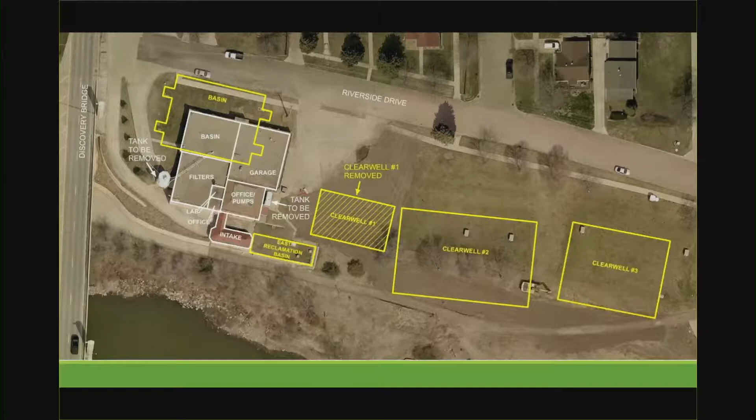Dave, can I ask you a question about the property? So when you say none of it is designated as a park, does that go all the way to the bridge then? That whole area is? That's from the title work that was done when the bridge was built. That's our understanding, correct.

Current status: it's got the correct electrical and plumbing services available to essentially be an office and a garage and a shop. If somebody was proposing some use there that would require a higher level of service, there'd be a significant investment in additional utilities.

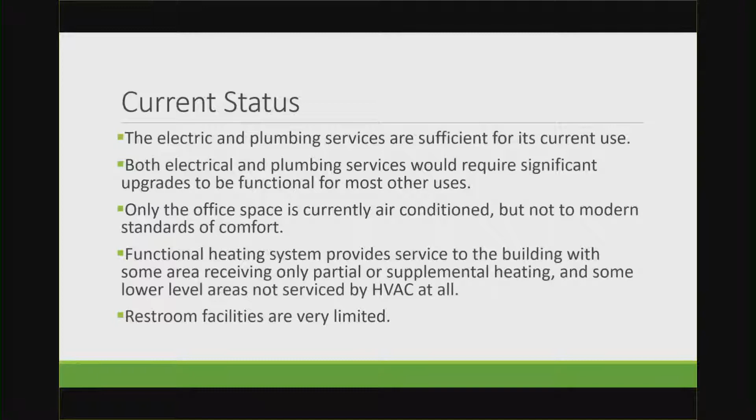The heating and AC, the HVAC, is functional for the office and garage area in the wintertime just to maintain comfort. It's not functional from an air conditioning standpoint where you would consider it acceptable for occupancy based on any modern standards. And restroom facilities are basically shop restroom, not something that would really be reused.

Here's the good news. The engineer structural assessment was all in all pretty good, and we had NOR Engineering go through and check all the foundations, do a complete analysis that included roof, plumbing, windows and everything. Yeah, it's an older structure and it's got some wear, it needs some tuck pointing. It needs some roof work or potentially even a roof replacement. There's some grading issues. But all in all, structurally, it's a fairly sound building.

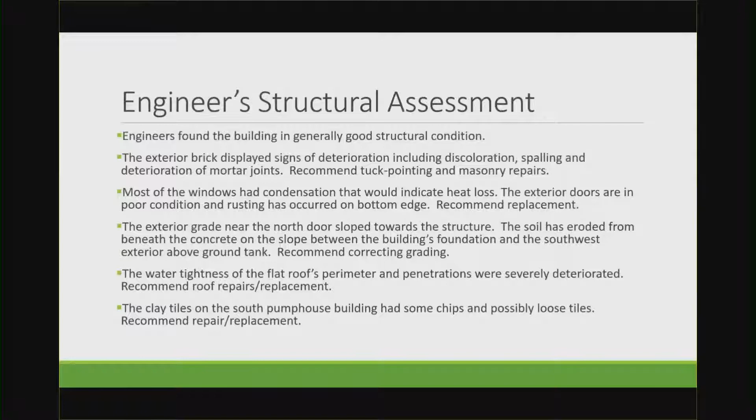Recommendations for future reuse from the engineer as they were doing the analysis: they determined that the structure could potentially even support an additional story, just based on how it's constructed. They even reviewed the possibility of having a structural floor that would span the clarifying rooms and allow for open storage. So right now you've got these big basins, and we'll see some pictures of it coming up here. But they could have a deck constructed over them and serve as a large floor area.

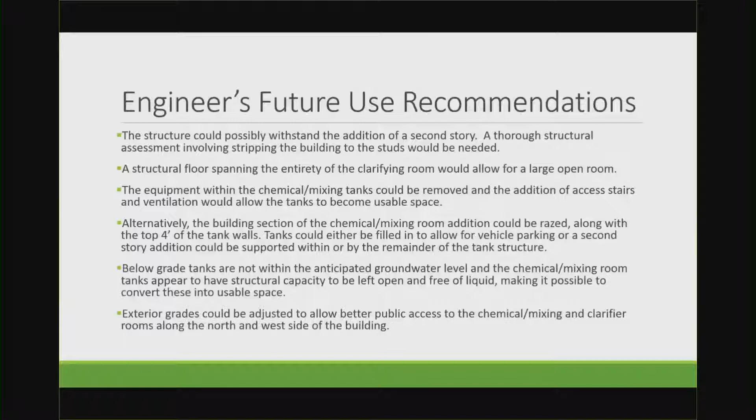There's still a significant number of tanks and things that are below level. The other piece of good news that we were really worried about with the structural analysis was, when those tanks don't have water in them, would they have the possibility of deteriorating because they don't have that hydrostatic pressure holding the walls out? Does that mean that if there's ever any soil pressures or water pressure on the outside, would they be in jeopardy? The engineer's analysis of that was that no, they would not be, and they actually are above where normal groundwater levels are in that location and shouldn't have issues with that. So they would be able to stay there and be dry and not be in danger of structural issues associated with not having the water in them. That's a lot of nots in one sentence, I'm sorry.

Hazardous materials assessment: yeah, there's some asbestos abatement that should occur, and that might be something that we talk about doing no matter what happens with it. In any scenario, based on some of the more recent abatement projects we've done, we're estimating there's a $10,000 to $15,000 abatement project that should probably just occur even if we don't make a decision to do anything, or if you decide whichever way you want to go, you might want to just get that taken care of.

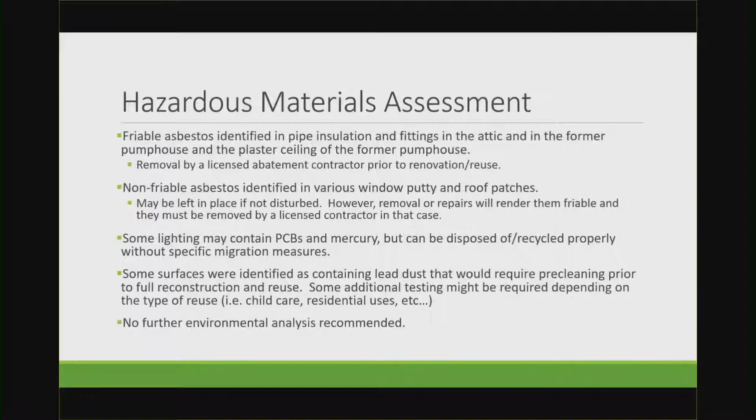And there's a lot of non-friable asbestos also that can be removed and disposed of in more standard means. So there'd be a contractor that specifically addresses those sort of issues involved in capturing the friable asbestos and removing it. The rest of the things that were noted are all pretty standard for buildings of that age, so not anything that was too surprising from a reuse standpoint.

Same picture again. The thing I guess that you can really see after hearing that other information is when you look in the upper left-hand corner of this picture, those basins actually go out under the grass and under the sidewalk up towards the street right-of-way. So I know there was talk about, hey, well, there could be a bunch of parking potentially along that street, some diagonal or head-in parking or something there. Well, there's a basin under that sidewalk, so that really isn't an option either to park over the top of it to try and gain some street-type parking, street-side parking.

With the tanks that are scheduled to be removed—or I guess my question is, are they scheduled to be removed, or is it just saying they will be? Those underground basins will be there as long as the building is there. Those are part of what's holding the building up. Yeah, and I'm talking about the external ones on the east and west sides. Clearwell number 2 and 3, Kyle? Clearwell 2 and 3 have to stay. That's what we consider our chlorine contact time, so that's actually critical infrastructure.

And then you see the two tanks to be removed. Yeah, the CO2 tank and the lime silo, we'll be working on getting those removed this summer. In any event, those two exterior above-grade tanks should be gone no matter what direction we go.

That wall right there is very visible from the highway. I'd say if you're looking for input on whether we should put a mural there, I would be interested in that concept.

Okay, street level space - more information on what kind of usable space we're talking about. There's about 9,500 square feet that could be considered at street level. That includes the decking over the basins and things like that. They're all broken up into different areas, and a number of the separating walls are load bearing. So that 9,500 square feet isn't a big open space in its entirety - it's broken into smaller various spaces.

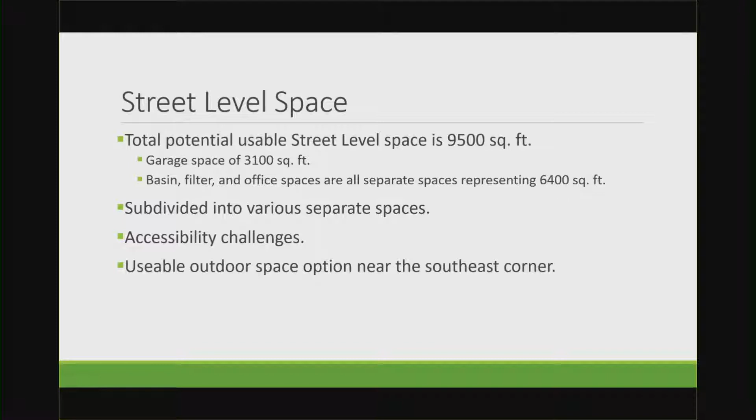There are, or would be, a number of accessibility challenges for any potential reuse. And again, that space on the east-southeast corner where the parking is, and where the old clear well was filled in, there's some additional property that could be used outside in this area.

Just going to go through a bunch of pictures now of what the interior looks like. No need for commentary unless you have questions, mostly for Kyle - these would be Kyle questions. So obviously there's the shop garage area.

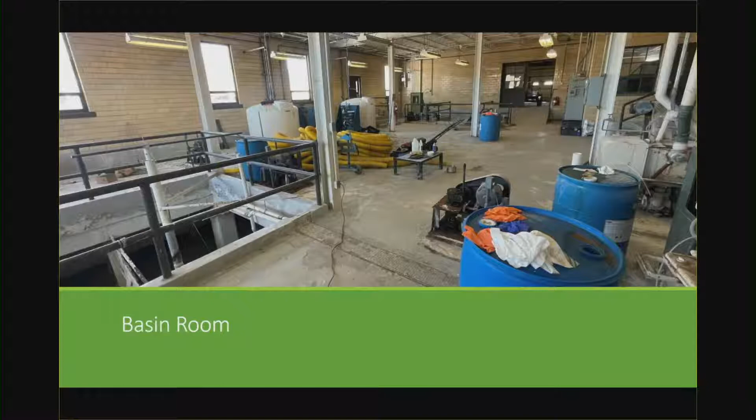Back in the southwest part of the building is where the basin room is. These are the types of wells, basins that you would consider potentially clear spanning to create some space.

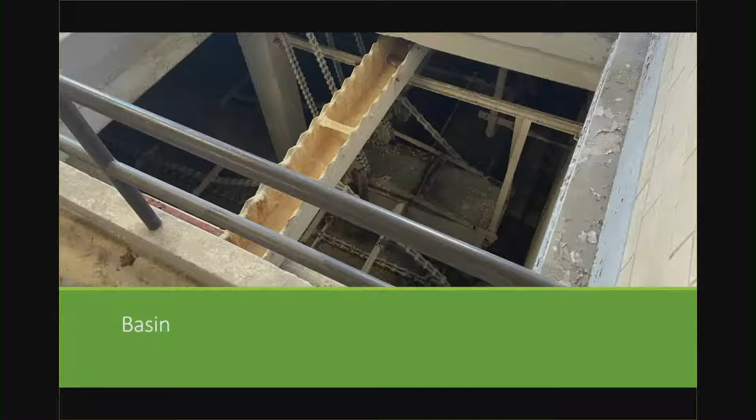Lower level space - the only part of it that has any windows at all is on the south end. It's kind of, I wouldn't call it a walkout, but there are windows facing south in the lower level. The basin area is 2,200 square feet, so there's a fairly good space down there. The problem is access to it is extremely limited, and there are no elevators or manageable stairways.

Yeah, the East Reclamation Basin is essentially windowless with very thick concrete walls. I don't know if that means it's an opportunity for storage or something for whatever occupancy is upstairs, but the reuse of it for occupancy really isn't in the cards based on its construction.

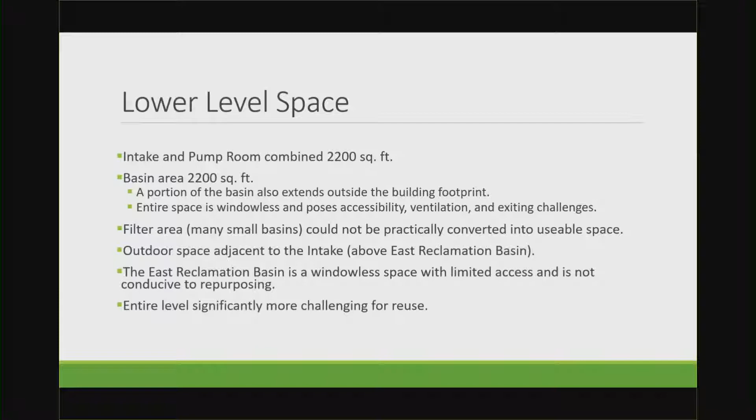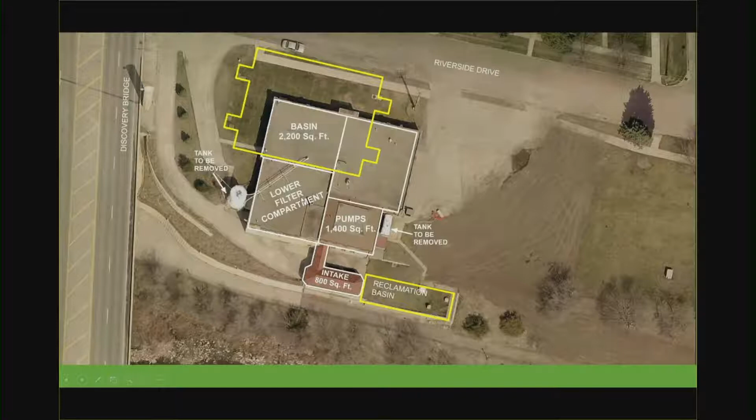I just keep showing that picture in case it brings up a question after we talk about things. So the lower filter room you can see is in that southwest corner, and that's what that looks like inside. And that's the walkout.

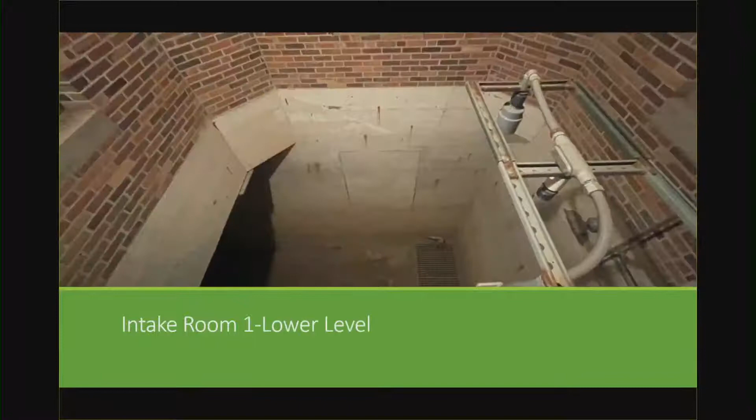The intake room is that other little building with octagonal components on it, the angled building in the southeast corner of the location. Couldn't really envision or reuse it - not too many opportunities for reuse. I'll just leave it at that.

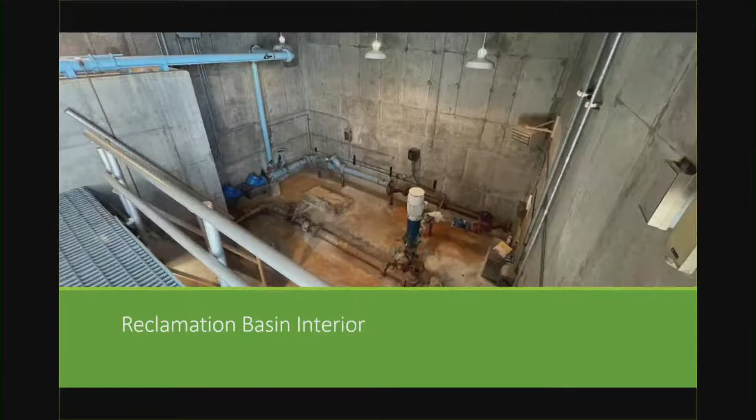On-street parking, City Manager Leon touched on that. Based on its location, if you were to try to work out some occupancy, that might include gathering space. With that building there, the building footprint itself takes up a lot of the space, and parking is fairly limited there. There's a residential street to the northeast of it, and Cedar Street there.

Vehicular access to the lower level—when you wrap around the building on the west side and come in, that's actually got a special permit from the state of South Dakota across state right-of-way just for access for the water treatment plant. So there'd be a process involved if an alternate use occurred on the site.

It needs some roof work. It might be a good idea to start trying to figure out what an entire roof replacement would cost. I think in the library budget next year, we have a roof for that building at $150,000. So that gives you a ballpark of what roof work would cost.

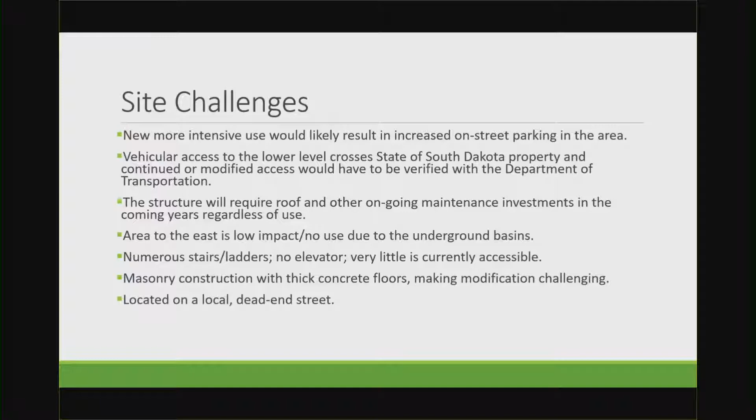The area to the east—Clearwells 2 and 3—are low or no impact because of the underground basins. I'll show you some pictures of the stairs in a second here, and there are ladders. The masonry construction, like I said, it was built to be a water plant, so everything is easily well beyond any normal structural construction thickness that you'd see in a bank or something like that.

Pictures of the stairs and the type of means of access to different levels.

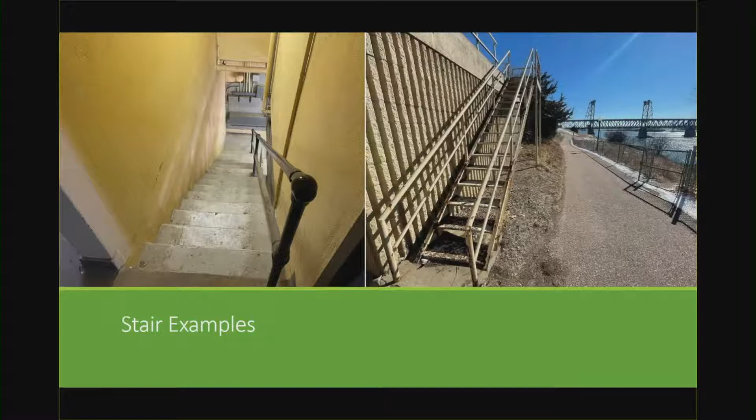Site advantages—and I'm sure we can add a number of these to the list—but obviously the view shed; it's an incredible piece of property right on the river.

Like I said, the biggest liability might be the building itself. Highly visible to traffic crossing the Discovery Bridge. The exterior architectural features are unique and interesting, especially with that portion on the southeast corner. Easy access to the bridge and plaza downtown, other amenities, the trail, and it's in the Meridian District.

If there was to be an RFP, we were just kind of brainstorming what that process would look like and what we would want to be thinking about.

We thought significantly about sale versus lease, if that direction is requested by the commission. It just seems like it wouldn't be the right thing to do to actually transfer fee title to that property. But that's a city commission decision—you'd have to think about that.

So if it were to be occupied, it seems more probable that a long-term lease might be a better idea than a sale. The problem with that is it's right off the bat a disincentive for private investment—whoever gets that lease isn't going to be as likely or excited about putting significant resources into the location if it's on leased property instead of ownership. So we'd have to figure out how to balance that, and it might involve more city participation in structure maintenance on the front end anyway.

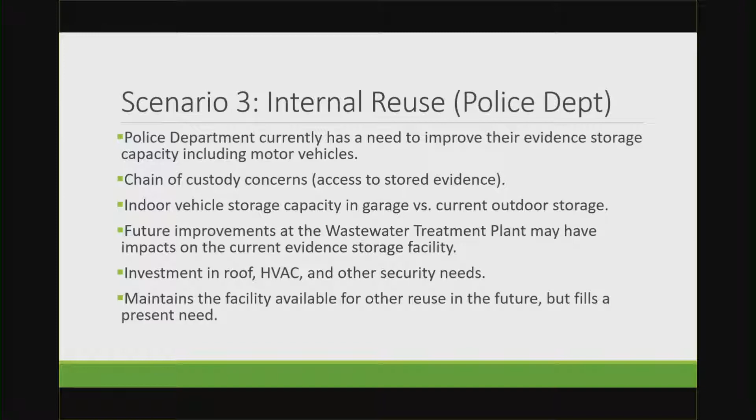That is about 5 or 10 minutes longer than I wanted to spend, but I think what City Manager Leon said in the beginning is really, really important—that if you have not been in that building, you need to do that just to get a real idea of what opportunities and challenges there are.

And with that, I'd turn it over to Kyle. I'd be happy to try and answer any questions, but I'm guessing we're going to lean on Kyle.

Hey Dave, speaking of opportunities, this area was specifically carved out as an opportunity zone. Has any individual or entity reached out to your office with that in mind?

Not with that specific thing, but I've had it in the back of my mind that if the right project is out there, or if we wanted to recruit a project, that would be potentially a part of that package you try and work into it.

Are you familiar with the terms around opportunity zones and the funds associated with them enough to talk about that? Only because of the way the PowerPoint got put together, and I understand staff's recommendation is a lease—that's not an option if we're talking about an opportunity zone.

Correct. And I know just enough about opportunity zones from a couple of years ago when they first came out that I would probably want to do more research to get back to you in more detail. But essentially it becomes an owner-occupied project that provides tax incentives for a group of investors. You understand what they are probably better than I do right now. So, yeah.